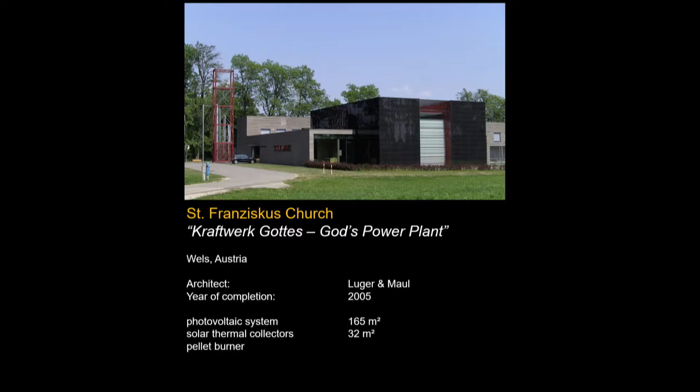Let me render you with this presentation some challenges that we faced in implementing these technologies. What we have at hand is a selection of techniques that are quite common today, but still in everyday construction, not all clients, not all builders are willing to adopt them. The average knowledge of these technologies is increasing all the time, but academic research, of course, runs several steps ahead of this development.

We are learning all the time, new products are coming in all the time, and results are becoming better. But my intention now is to present some remarks and findings on challenges when applying these technologies in practice.

We have wind energy in small scale in the built environment, solar energy, solar thermal and photovoltaic panels, where solar thermal is a more integral part of a building's systems, but photovoltaic technology can be more like an add-on, something you can more easily integrate in existing buildings. Maybe the most difficult part is to find good implementations of wind energy in the built environment.

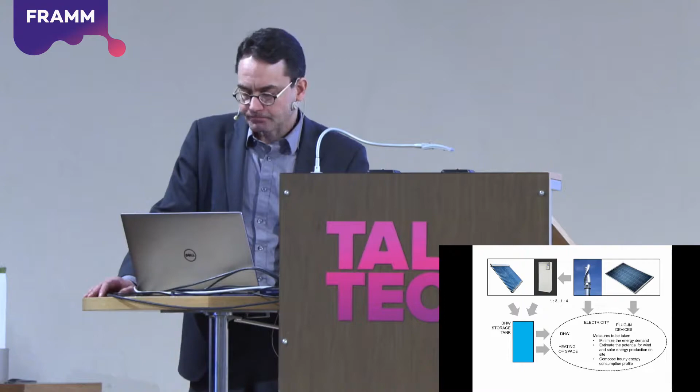The expectations related to photovoltaic energy are, of course, sky high. There are quite high percentages presented of already existing technologies in solar energy and electricity. But what we have today in real building projects is maybe closer to an efficiency of 15%, maximum 18% at system level. I'll show you that in reality, the percentages we gain in real systems remain at a much more modest level.

Never is the theoretical output of photovoltaic panels happening 100% in practice. There are certain constraints to that.

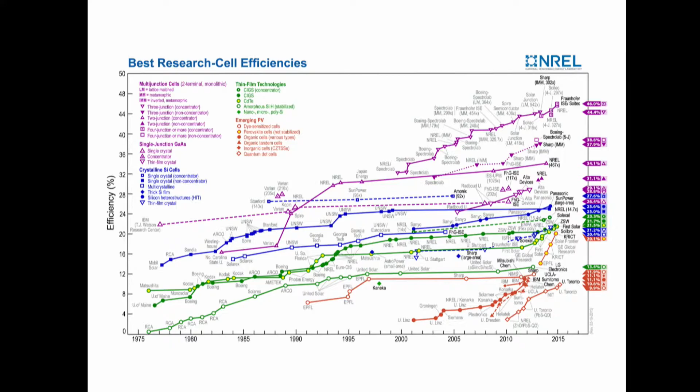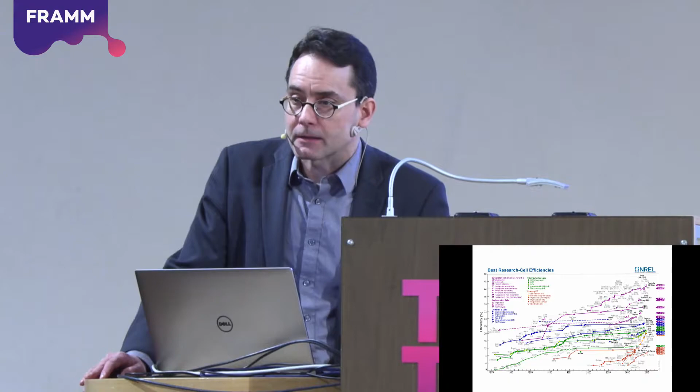This is a chart from a few years back by NREL, which today probably faces a lot of trouble with the Trump government in the US, but otherwise has been a very active promoter of renewable energies, and I will get back to this also. In the Finnish environment, the percentages presented to us are not as high as in the diagram by NREL. They talk about up to 45% efficiency in these technologies.

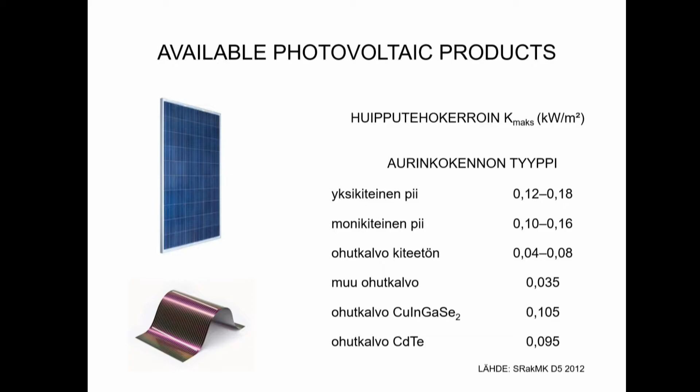We talk about less than 20% efficiency, and that would be in optimal conditions. We have these thin film technologies coming into these integrated panels. There's a lot of research and even some experiments with new technologies such as Grätzel cell, but it seems that still today the best economic solutions are found in quite conventional photovoltaic panel technology based on monocrystalline or polycrystalline silicon panels.

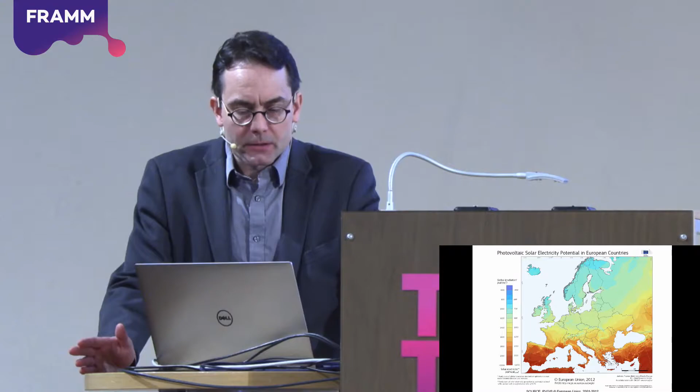In climate charts, this is a diagram often presented when we want to say that the potential for solar energy is quite good in Estonia and Finland. But what is not seen in this annual insolation map by the European Union is that how this solar radiation is divided is not equal within this yellow or greenish tone in the previous chart.

We get a lot of solar radiation in the summertime and very little in the wintertime. So actually in the north our challenges are bigger, and the demand for cost-efficient battery technologies would be actually even higher in the north.

Here we don't actually need battery systems that help us go over one night, but more like seasonal storage of electricity. That is the biggest demand, obviously.

The Swedish researcher Joakim Widén has rightly pointed out that when we talk about net zero energy, we are talking about calculations with a lot of uncertainty. First, energy output numbers are expectations based on standard years of insolation and output that usually never come true in reality. Also, the energy consumption of a building changes according to independent households' consumption patterns. This means that net zero energy balance is actually a highly theoretical value, not a very useful figure to express the environmental performance of a building. I will later show you that other kinds of numbers could be more accurate or useful to describe what is gained with renewable energy in buildings.

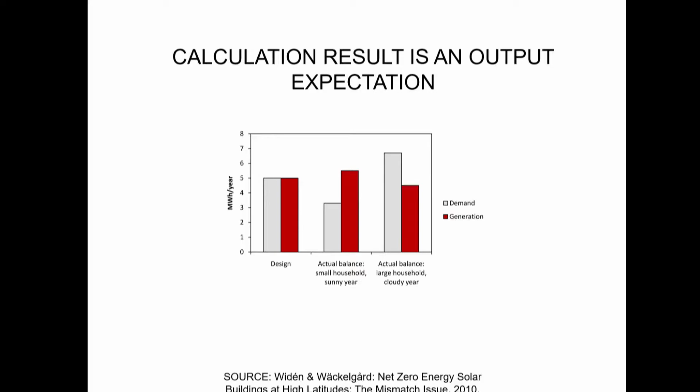We did some studies in my practice for the city of Oulu, which is already quite north. That used to be the northernmost school of architecture for a long time, the School of Architecture in Oulu. Now there's one in Luleå, Sweden, but that's quite far north. Still, up there we are able to show that photovoltaic systems can be a profitable solution. About environmental benefits, I will show you a comparison a bit later.

Here we tried to define what is a good output, how we should use the panels to gain maximum output. Basically, we as architects, as the persons deciding how we integrate these panels, are also defining the profitability of these systems and the environmental load of these systems. The manufacturing and transportation of these panel systems is the same, but we basically determine the output of the system. The very same system can have very good output or much poorer output depending on how we place the panels in the urban environment.

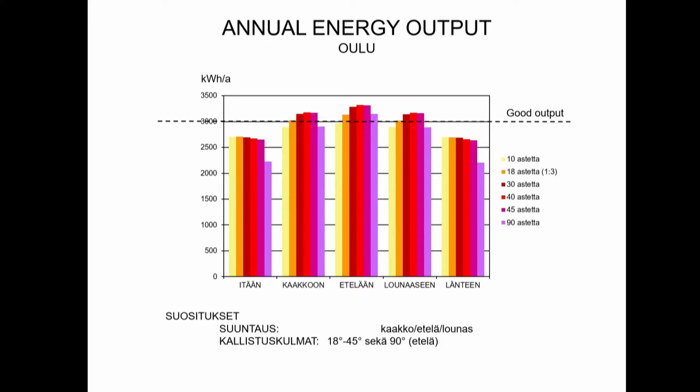This is an example of a daycare center. My office was leading an expert team that created the zero energy daycare building concept for the city of Vantaa, the third biggest city in Finland. These findings from reality showed why the theoretical output of these systems is actually never coming true.

A very small direction change, only 2% off optimal direction, or 24 degrees, causes us a loss of 2% of the maximum output. The buildings around it, adjacent buildings, make us lose 8% of the maximum output. And if we assume that from December to February there will be some kind of snow cover, even though that's not happening every year, we will lose another 5% of the output. Yet with this calculation, we are still on the plus side—the output is good enough to be implemented in our climate.

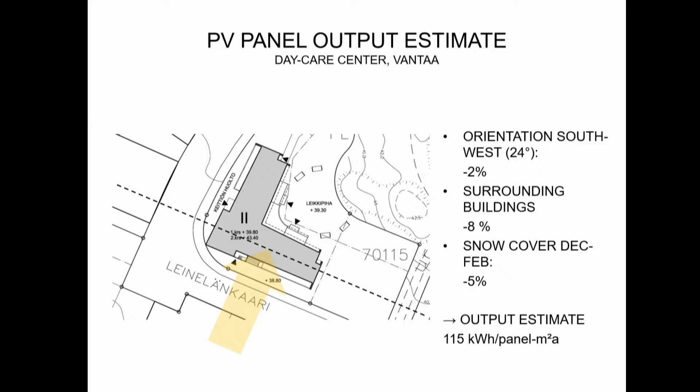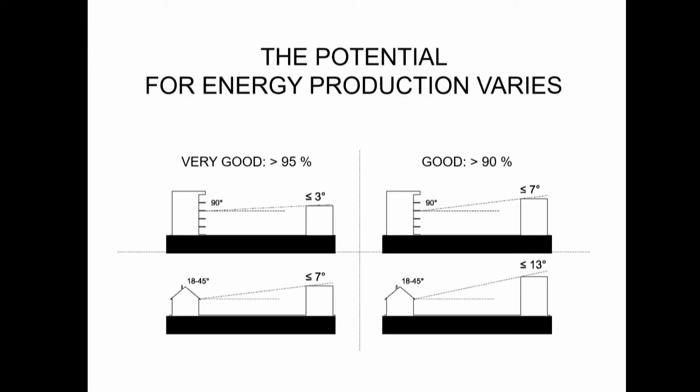This is in the south of Finland, where the output is very similar to Tallinn's climate. For the city of Oulu, we produced guidelines for northern climate—what kind of limitations we can accept in the environment, what kind of shading buildings there can be to have economic viability for these systems. Certain studies of shading of the environment were done, and these are today guidelines in the city of Oulu for implementing these systems.

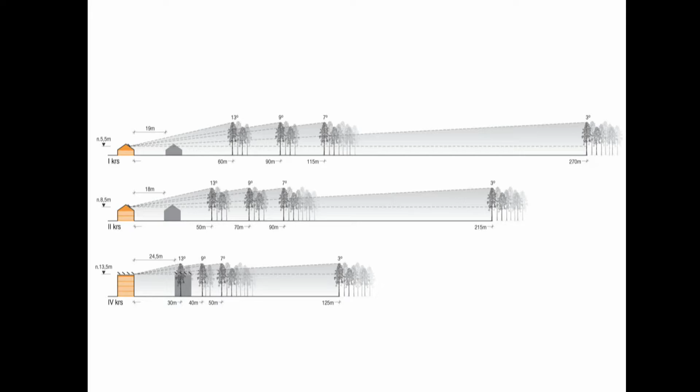Today, what is becoming more and more important is city-scale analysis of solar potential, and this can be done using many tools, but the city model is actually a key tool in this development. I've learned that in Tallinn, Estonia, there's also a project going on that aims to produce a model of the whole built environment. This is just one of many uses where this kind of model can analyze where the potential is and where it's weaker. This will have an effect on prices of plots in the future—what is the solar potential of the plot and site?

This is a study that we did in Turku, southwest Finland, for a housing company that consists of 4 buildings built in the 70s, where we were able to show that from photovoltaic systems on the rooftop, they will basically get cheaper electricity than from the grid, the Finnish grid. All these green locations for photovoltaic systems would give them cheaper electricity than what they pay today for grid electricity.

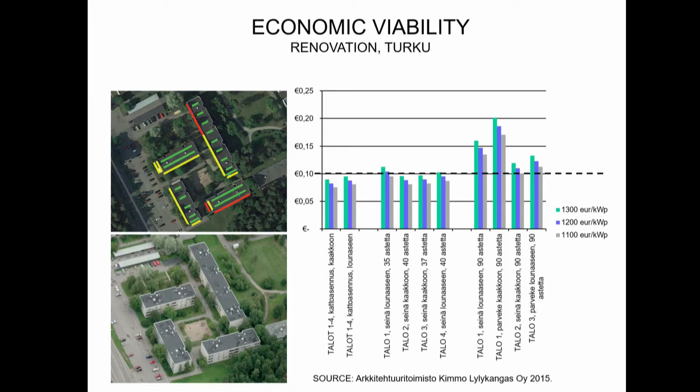But the challenge in reality is not with these calculations, it's actually that with this purchase of a photovoltaic system, you buy 25 years of electricity in one purchase. For this to happen in reality would mean that you want to stay in this building for 25 years—who knows if you want to stay there that long? Or there should be economic systems to pass on these investments to future residents of your apartment. These systems don't exist today, and this is of course something that is reducing or preventing housing companies from making these investments.

Another practical investment bottleneck is that households have their own electricity agreements with energy companies, so it's very difficult to allocate the output of the shared system to private agreements with energy companies.

Problems are not technical, but still very real. One big promise that still, at least in our market area, is not coming true today, even though the products are there, is building integration. That means that even though we have profitable photovoltaic panels at hand, we can buy them now, and by placing them wisely, we get cheaper electricity than from the grid.

We are not using products that would replace a facade material or roofing material, and quite obviously that would improve the economy of that investment. But for some reason this is not happening. This is a big promise that hopefully starts to generate more and more investments in the future, but even the distributors of these technologies confess that for some reason there's no market for these products today. When Finnish investors, when Finnish developers buy these products, they buy them as separate systems, not integrated.

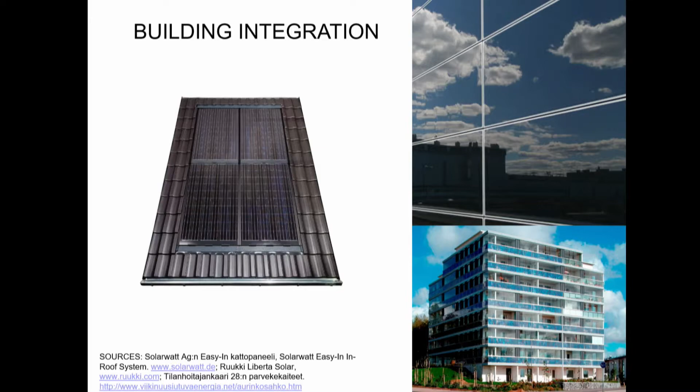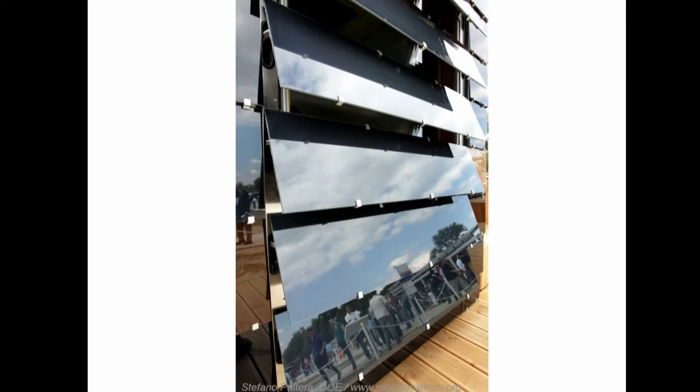And we've seen very clever integrations of the photovoltaic panels in many pilot buildings, but they are tailored solutions. To find products that you could buy for a modern building that today consists of products, there's less and less possibility of tailored solutions in housing production, for example. They are not that many. The most economic solutions are installed today on the flat roof.

An important remark for the economy of these systems is that the way these panels are installed is actually quite a crucial decision, because that can make the systems too expensive and ruin the economy of the investment. So basically we are searching for solutions where the installation is quite easy, and today that's just installing these panels on the rooftop, with weights and not penetrating the waterproof layer at all. With these systems, the economy is quite good, but the dimensioning guidelines in our climate have been missing.

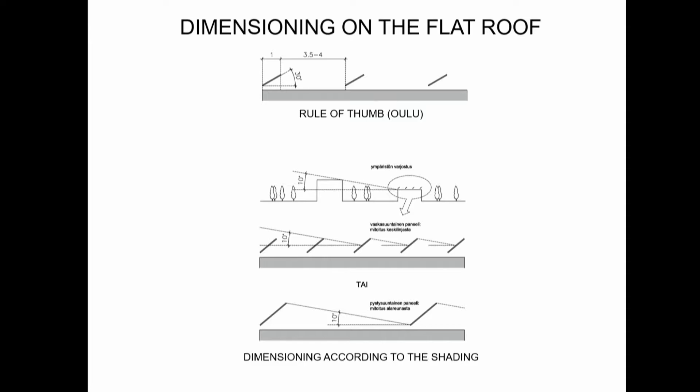In southern Swedish climate, the rule of thumb was that between these kinds of panels, like in the upper image, the distance was 2.5 times the projection width of the panel. In northern climate, it should be more, obviously, as the sun angles are lower. So our recommendation after several simulations was 3.5 to 4 times the width of the panel. This means that on a flat roof, the number of panels is not very high, and the output of the whole system is not very big. There's an alternative system to dimension these flat roof systems, and there the guideline is different depending on whether your panels are in horizontal or vertical position.

The interesting question of load match has been discussed in many research papers, but today is still not very widely understood among the consumers or even developers of these buildings. This means that even if the annual net balance of energy production and consumption would be 100%, you produce as much as you consume, in reality, the energy comes at the wrong time. You don't need it at the time when it comes, and this of course happens in the north more than in the south. We have a lot of solar output in the summer season and very little, if any, in the winter season.

That is without batteries. These studies today are usually hourly-based, which gives us a bit of distortion in the results. They give us a somewhat more positive result than the reality is. But to improve this load match, we can do a lot, and I will later show you some examples.

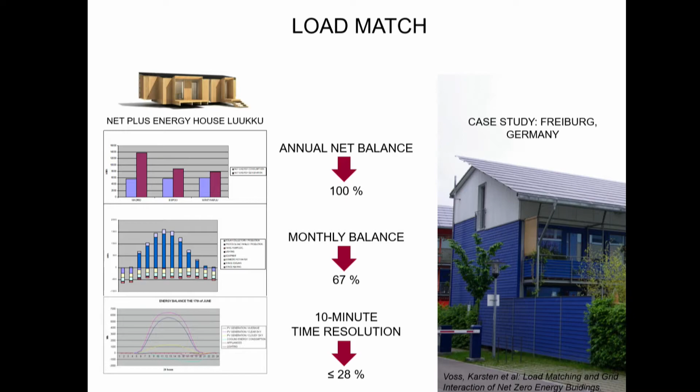My experiences in plus energy building are to some extent from this building, the project that I started at Aalto University. This was the first plus energy building in Finland that we took to take part in the Solar Decathlon Europe competition in 2010. We got the first prize in the architecture contest and were in fifth place in the general competition. So we were doing quite fine with Finnish products and Finnish know-how, and I believe that with Estonian knowledge we would already be in a very successful position over there.

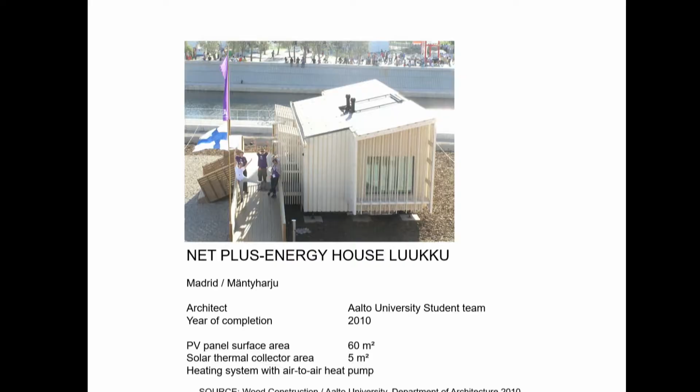The challenge that we wanted to take with our student team, which consisted of about 100 students altogether, was that we tried to make it a plus energy building both in the northern climate and in the southern Spanish climate. And this was quite a challenge. For those who don't know the competition concept, this is something that was started in the US. Maybe you know that whenever there's a Democrat president, all renewable energies are highly supported by the government, and at times like this, they are quite the opposite, not supported by the government.

I don't know what is happening with this competition today, but the original concept was to collect 20 plus energy buildings on the National Mall in front of the White House from university teams to compete for 1 week in not only energy, but in 10 contests. And this is a great learning environment, of course, for university teams to learn about other teams and develop their own concept for plus energy buildings.

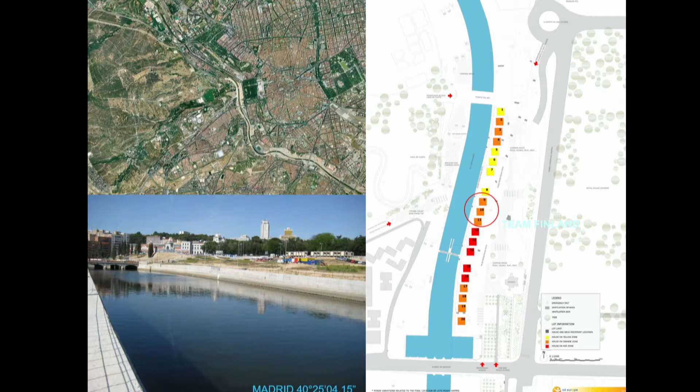Our building was here in Spain, and an interesting remark for this area by the riverside in Madrid was that the master plan for this area had to be done in 3D to secure that all the plots have equal access to solar radiation. This is maybe the future in planning here as well. If we want to provide equal opportunities for builders to use solar energy, we have to make studies not only on 2D maps, but in 3D reality.

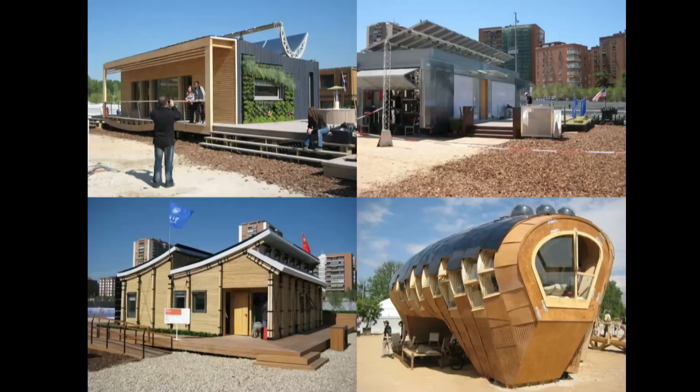This is our building over there, and these are some competing houses. We can see that plus energy buildings and the integration of photovoltaic panels can have many forms. There's no one fixed form for this integration. Some of them are more successful and some, of course, less successful. We were going on with not that experimental systems, but still some things we could do with photovoltaic panels. We used panels where the modules are very tightly packed to have maximum output, and we used so-called pyramid glazing to maximize the output of the system.

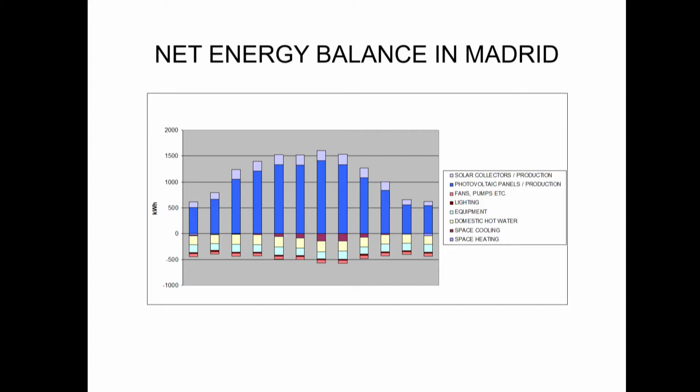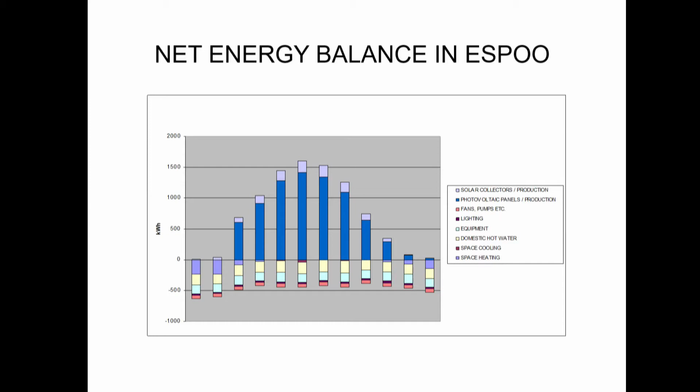And this is how the energy balance looked in Madrid. You see that in that climate, I think the load match can be much better than in our climate, where the winter season can be easily noticed in here. This is our challenge in plus energy building. This is something that we need to overcome in the northern climate, and that's not an easy thing to do. The net zero energy balance is purely a theoretical figure, but if we want to survive these seasons with renewable energies, we have to come up with some new solutions, not only photovoltaics. Maybe it's batteries, maybe it's something else.

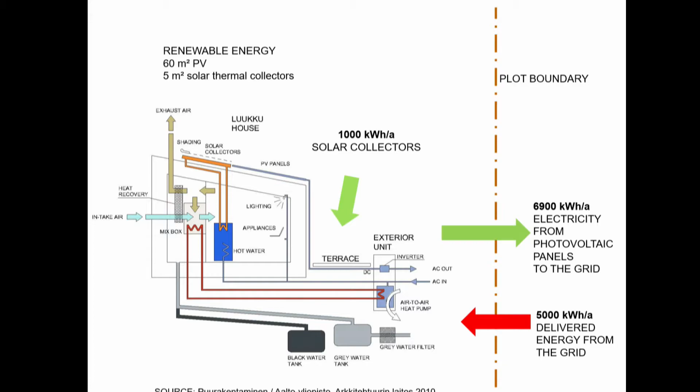This is the final location of the building. In this building, we didn't deal too much with the load match issue. We were just producing as much as possible for the grid. That was one part of the competition, and then purchasing energy from the grid. This is how it works today in Mäntyharju. One finding of this balance, and I was not satisfied with this result, was that the larger the photovoltaic system, the less it covers of real energy consumption. So this is the load match issue. When you only buy a very small system, you always find a use for the electricity that you produce.

But the closer you get to an annual net zero energy balance, the bigger is the difference between the real CO2 reduction, caused by the fact that you don't need to buy this energy from the grid at all, you get it from your own rooftop, and the investment, which is of course very high here. This part is something that you cannot use when it comes in the summer afternoons or spring afternoons, when the building simply doesn't have places to use electricity.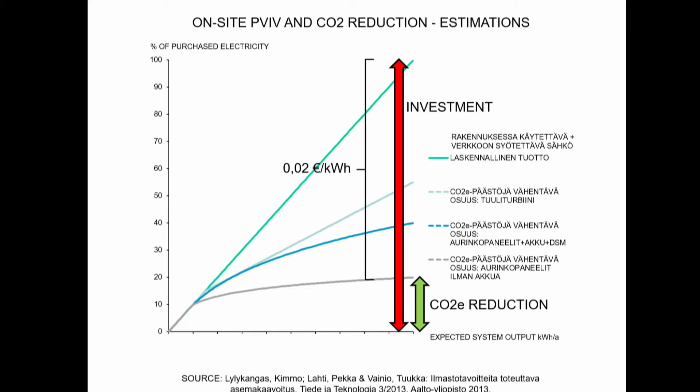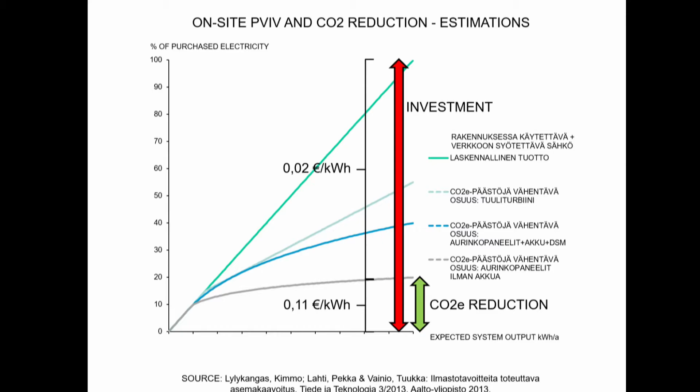This is the pricing, the economic equation of the system. This is what the Finnish market price for this electricity is without any subsidies. And this is what, in this example, a Finnish owner of the building pays for grid electricity.

So-called demand-side management could be an opportunity to engage also architects in this work. This means that we could time the energy consumption to match better with the energy output from the photovoltaic systems. In this simple study, we have a photovoltaic system of 8 panels, that's about 12.8 square meters on rooftop.

And simply by timing the use of household appliances, we get much better match in load curves, in energy consumption and production. This is a Finnish hourly consumption pattern where you see that the electricity consumption is very much happening in evening time.

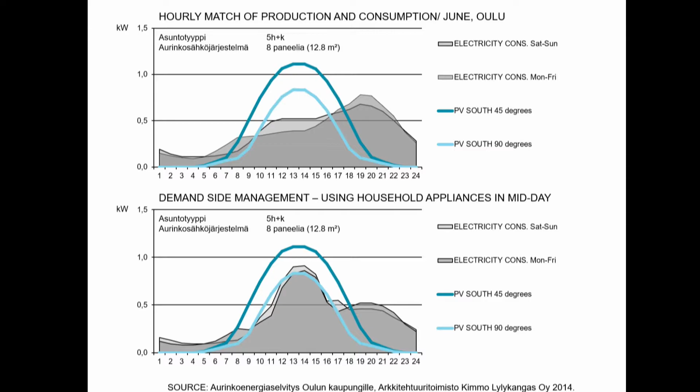Then I'm often asked if this really makes environmental sense to use photovoltaic panels. Don't they make these products in China and they have to be transported all the way from there? They have aluminium layers and glass panels and all kinds of components. Yes, they do, but we can compare the CO2 emissions of these products with the grid electricity through LCA-based studies.

This is a Swedish study from maybe 6-7 years ago where they compared, in an LCA study, the photovoltaic output and its CO2 emissions per kilowatt hour with grid electricities in Sweden, Iceland, Finland, Germany, Estonia, Poland, and the European average. And there we see quite an interesting remark. In Iceland, actually, using photovoltaic panels causes environmental load. It's much better to use grid electricity over there.

In Sweden, yes, you maybe gain something by using better photovoltaic panels, but the difference is very small due to the fact that about half of the grid electricity comes from hydropower plants. With the Finnish grid, the electricity that this replaces, you can see that it's already quite beneficial to use this.

But it's important to notice that if we, as architects or designers of the built environment, place these panels, make them face in the wrong direction or use angles that are not optimal, this increases, because with the same environmental investment, we get smaller output. So our choices here can actually increase this beam here.

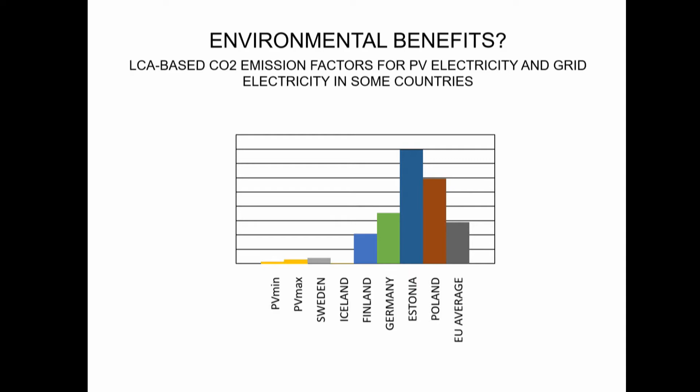Then comparing with Estonia, for example, it's quite easy to see that there's a very good reason to use photovoltaic electricity over here. The grid electricity that it replaces is very CO2 emission intensive. I then wanted to compare this with a newer source of information. This is statistics by the Covenant of Mayors created in 2017, and the latest figures are from 2013.

Actually, the differences between these country profiles have even increased. So it seems that the reason to invest in photovoltaic panels from an environmental perspective is not going anywhere. There's still a very good reason to do it. But interestingly, the Swedish development seems to be going in that direction where the difference is becoming really, really small.

If you sell a photovoltaic panel in Sweden, it might be, sorry again, wise to tell them that maybe you could save your money and use grid electricity instead, and the environmental benefit would be exactly the same.

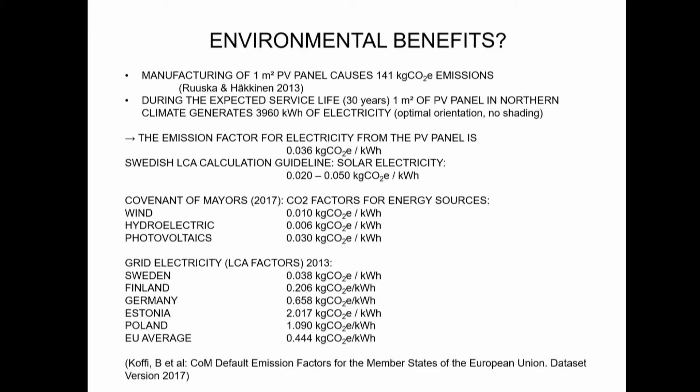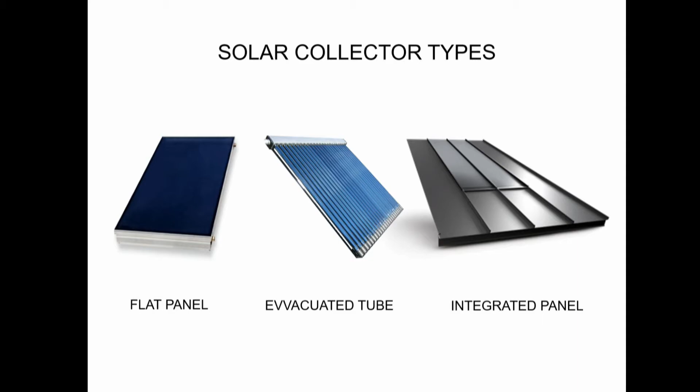In solar heat, the efficiencies of the systems are much higher, but for the consumers and developers, these are more complicated systems. This is something that you cannot simply add on. You need to integrate this in your heating system, and especially in the northern climate, this is not very easy. If the real percentages of efficiency in photovoltaic panels are somewhere between 15 and 20 in best cases, in solar heat systems we go up to 40% in very standard systems.

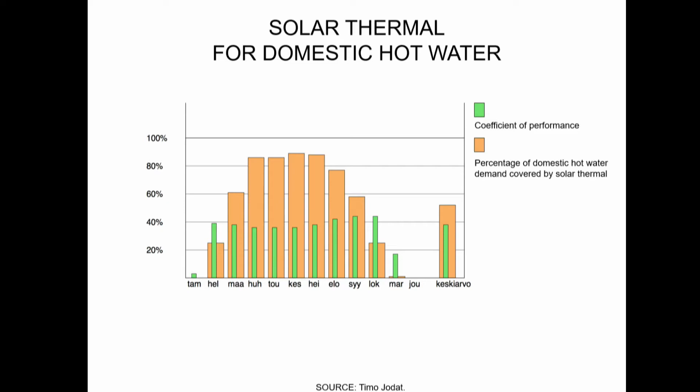Understanding the potential of solar heat, we tried to put that in this figure here. You can basically in our climate produce half of your domestic hot water with solar collectors. And if you want to invest in a larger domestic hot water storage tank, you can cover also some of the space heating, but 10% would be a safe estimate for that. This is simply because of the mismatch in production and consumption.

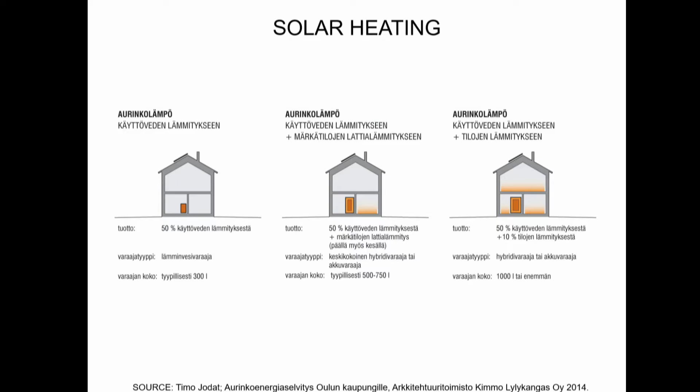This is a quite standard solution today. Also, the market is already believing in solar heat systems, so there's nothing exotic, nothing to be tested, but the possibilities of using these potentials and the dimensioning principles could be improved.

What we see today often happening is too large solar collector areas. That means that the economy again is ruined. You buy too much collector surface area, and then the users of the building are surprised when the benefit doesn't grow linearly, but is limited by the mismatch problem.

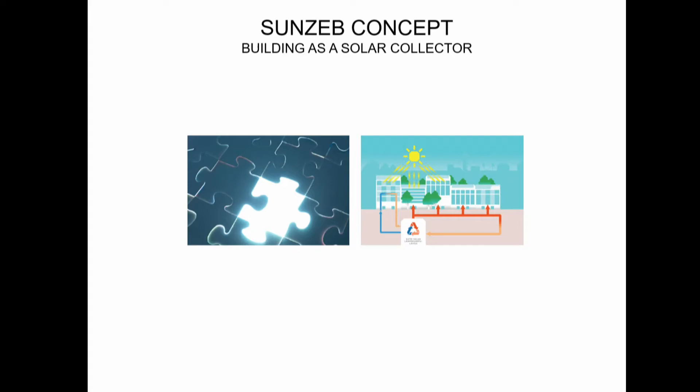I was part of this interesting development project quite recently where we think of solar heat in a different way. This is now city being the system, not a plot boundary or building. The city of Helsinki, in this case, developing a system of district heating and district cooling, and buildings are now solar collectors. In this project we were looking at office and residential buildings as big solar collectors taking in too much solar heat, too much in that sense that it needs to be cooled down.

But the city system can make use of this excess heat. In heat pump systems, they can be used in other parts of the city. And this, what I found very interesting here, is that cities may be a much better boundary line for these energy studies than a single plot or a building.

The whole point why we have cities is that we don't need to survive by ourselves. We don't need to build buildings that, like in the Wild West, were surviving by themselves. The whole idea of building self-sufficient buildings is not working along with the idea of a city. Instead of inventing concepts like passive houses or zero-energy houses, we should ask what kind of building fits to this infrastructure, this city.

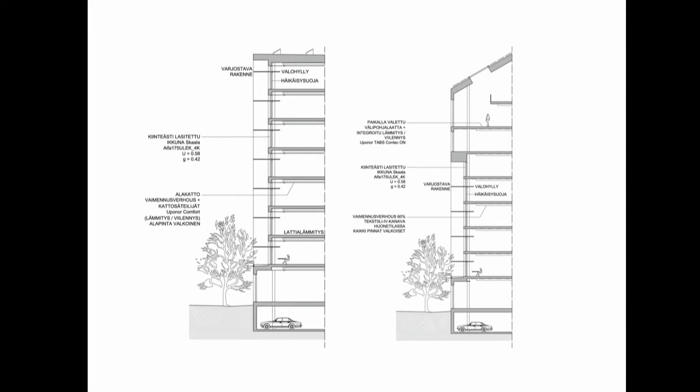And the same thing in residential buildings: we save a lot in heating. At the same time, we need more cooling, but the difference is much, much less.

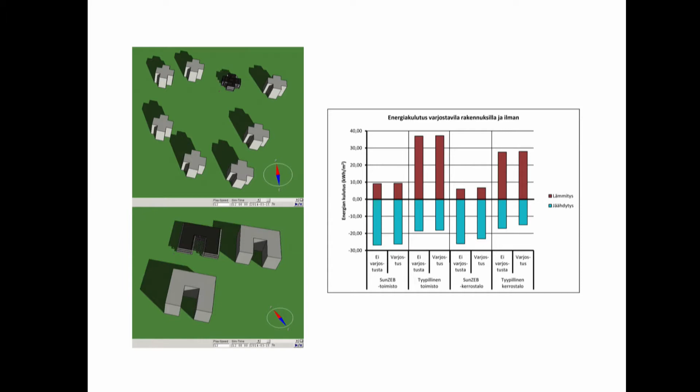Surprisingly, the study of the whole energy grid in Finland showed that the CO2 reductions are very small. This is because in our heating production system we use CHP, which means that savings in heating energy don't necessarily give us savings in CO2 in electricity production. They are combined together, and we could not actually, in these studies, prove any significant reductions in CO2 emissions.

One system of using solar as a heating device is, of course, passive solar, which is not used in our climate at all, even though the potential is there. Even up to the level of Oulu, the potential of saving in heating energy demand could be up to 20–30%.

And what we were looking at in this study was this curve here: what kind of window and building configuration could give us a situation where increasing window surface area means less heating energy demand of spaces. With very high G value and the right kind of architectural design, we can have that situation.

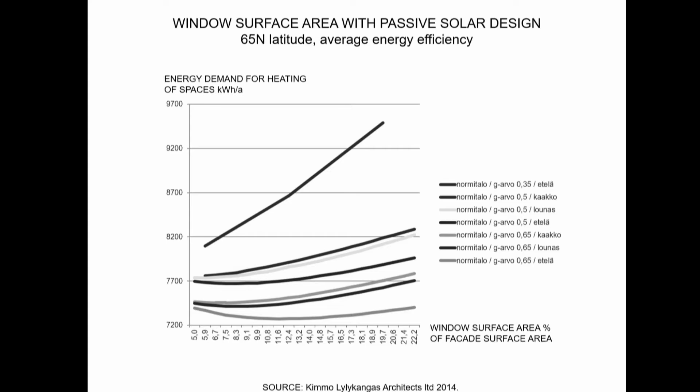But this is something that is quite difficult or impossible to find in modern glazing products. On the contrary, several layers of glass seem to lower the G value rather than increase it. And the skills of architects to produce this kind of buildings are not that good, I would say.

In wind turbines, the possibilities of integration are even more limited. This was discussed already this morning in the presentation, but the same kind of discussions have been going on in Finland. The biggest investments in wind power are being done in Ostrobothnia, on the West Coast, where there is already a situation that all the existing investments cover the area so well that you cannot find a place in Ostrobothnia where you wouldn't see at least one windmill working. And they are quite huge structures, of course.

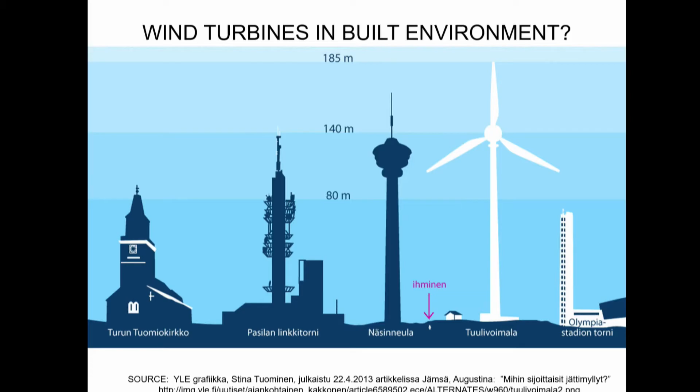In urban scale, integrating this kind of device, this finished product, is much easier. Until last year, I held the IPR rights of an innovation we did about 15 years ago in one project, where we made an off-grid street light using this kind of wind turbine, LED lights, some batteries integrated in this pole, a new kind of pole with environmentally friendly impregnation.

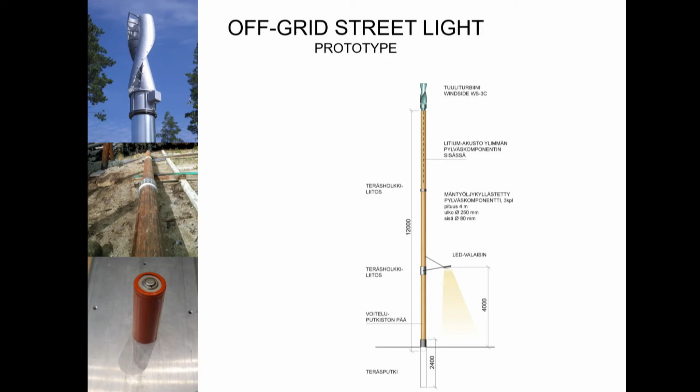The possibilities to use these kinds of lights, for example in sparsely populated countryside, would be quite interesting. But as you can see with this example, the output of this system is quite small. And if you think of a big office building, for example, you could say that in the energy balance calculation of this building, these are just decorations.

One challenge that we face with wind is that we have a lot of data available about wind conditions, but that's only up to a level of 50 meters. If we want to integrate these systems in the built environment, we're talking about different heights: 10 to 20 meters, 25 meters, and this data is not available. There's a good reason for that: the city itself is a device that redirects the wind, accelerates the wind speed, and slows it down. It's something that we don't have knowledge of today.

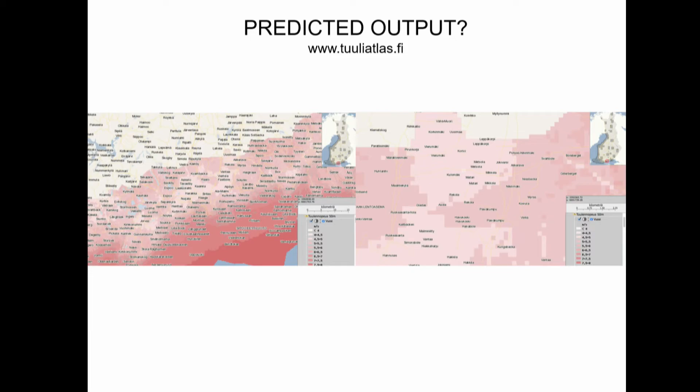This also, I hope, will be improved when we have city models available and can do CFD simulations in an urban environment to understand the pressure differences around the building and the wind conditions in the urban environment.

One field of experiment that I've been involved in has to do with CHP, micro CHP, integrated in the built environment. This means combined heat and power. In these units, you produce heat but also electricity, in this case using wood chips. There are also smaller systems using wood pellets, and the opportunity is to generate electricity on site from renewable energy sources.

The great benefit of this Finnish device is that it uses a so-called gasification technique. One problem whenever burning wood is the small particle emissions caused by wood burning, which is quite an important health risk, a crucial thing to control. In this gasification technique, that is controlled 100%. What we get out of this kind of unit is about 8 units of heat and about 3 units of electricity.

In this case, it was placed in this residential block in Oulu. This forms one entity where 2 loops of heating connect these buildings to this CHP unit. It needs regular refilling of dried wood chips, and availability of these chips is one critical development requirement in practice.

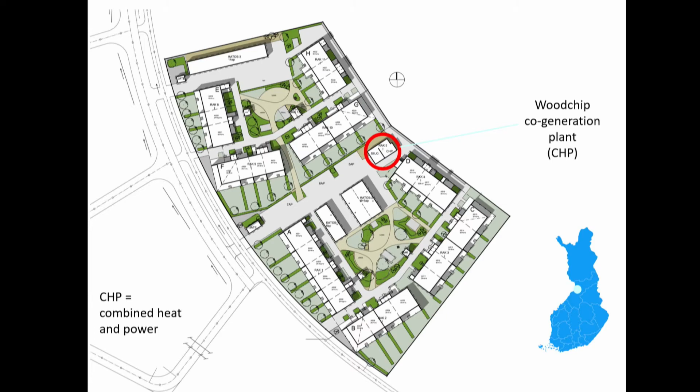For this reason, we are not able to use this technology, for example, in coastal areas in southwest Finland. Also, the burning of these chips causes low-frequency noise that we didn't know about before we did this prototype project. So even though this device is underground and surrounded by concrete walls, there's a really low-frequency noise that can cause some disturbance to the residents nearby.

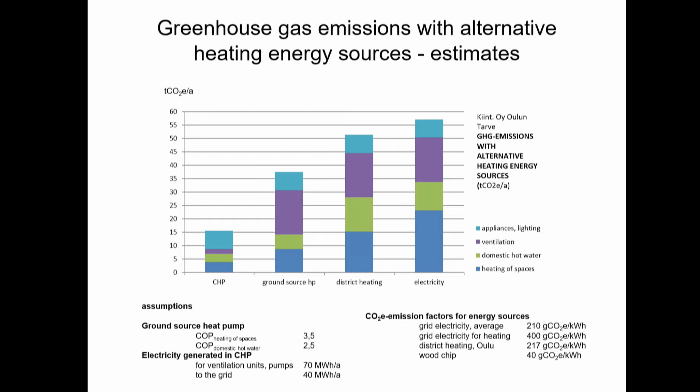However, the CO2 calculation of this system shows quite good results. This is a comparison of the CHP solution with the best ground source heat pumps available, district heating, and electricity heating. When we can also have very low emission electricity from on site, the total CO2 emission calculation shows very good results.

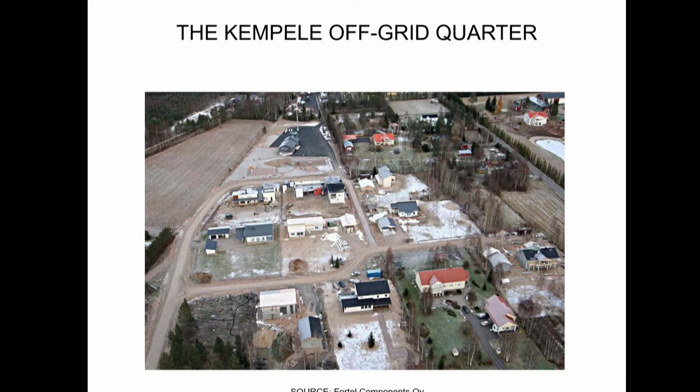There's already an existing off-grid quarter in Finland called Kempele Eco Village that operates with wind power and this kind of micro CHP unit alone. However, this kind of solution has to be something we already take into consideration when planning the area. We need space for this kind of unit which is safe for the environment, and this noise has to be taken into consideration. Also, the heat distribution system has to be based on this kind of loops, because the heat is distributed at quite high temperatures.

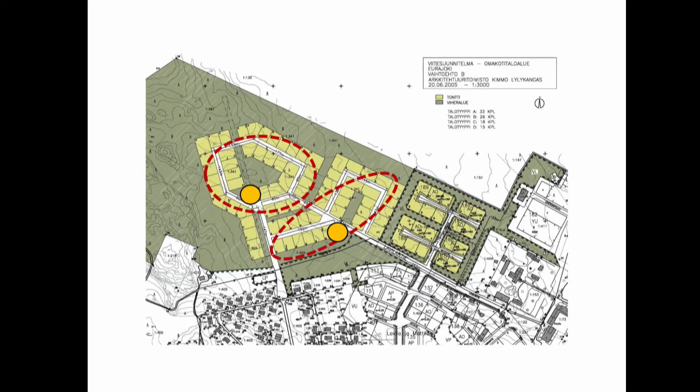These are some examples of master plans that could support use of CHP, micro CHP units. This is one of the student projects that I've been doing. This was at Aalto. I was leading the team that took part in the competition in Japan.

Our entry was called the 5-tree house, because with wood pellets from 5 trees per year, we can cover the whole energy demand of the building, both electricity and heating. So we created a story where the family plants 5 trees every year as a kind of compensation for the energy it uses. This is totally off-grid.

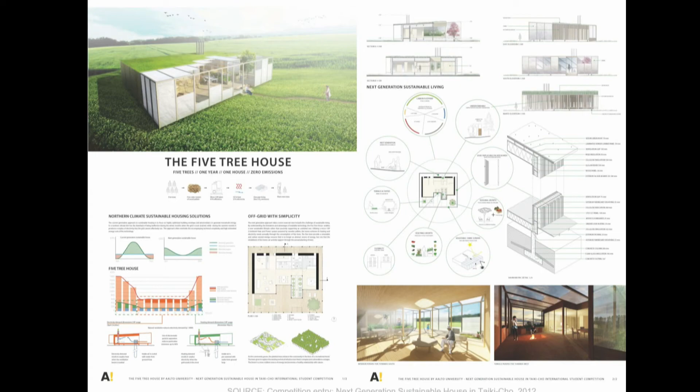The interesting study for us was to look at, in the summertime, the CHP unit driven by electricity demand, and in the wintertime driven by the heating demand of the building, and finding use for this excess electricity and excess heat.

I'm going to move to concluding remarks now. I'm sorry that my voice seems to be breaking after a long flu. My concluding remarks have some things to say about these experiences.

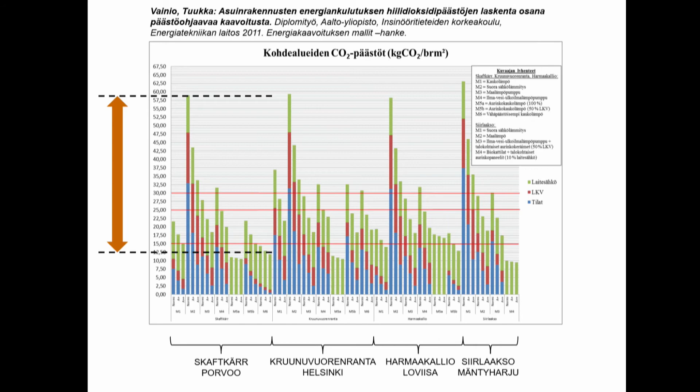Regionally, we have different kinds of potentials for these choices. I will not go into details because time is limited, but this is how we see the potentials in Finland. Probably Estonia could be mapped in a similar way.

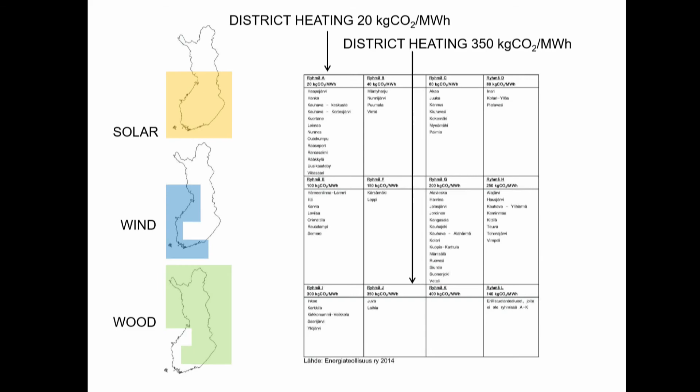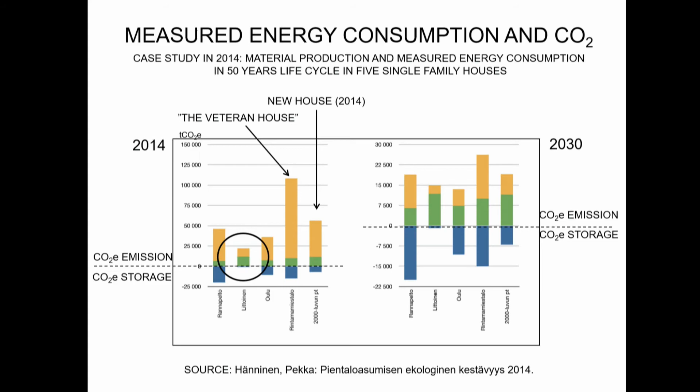New parameters for these examinations could be the real energy consumption, because that is always different from the calculation, the assumption of future energy consumption. This is due to many reasons, but to see this as a parameter is very important. This is a study of single-family houses in Finland based on measured energy consumption and real material choices of these buildings.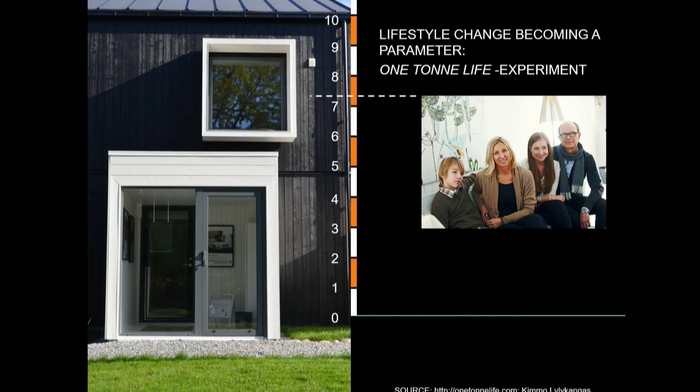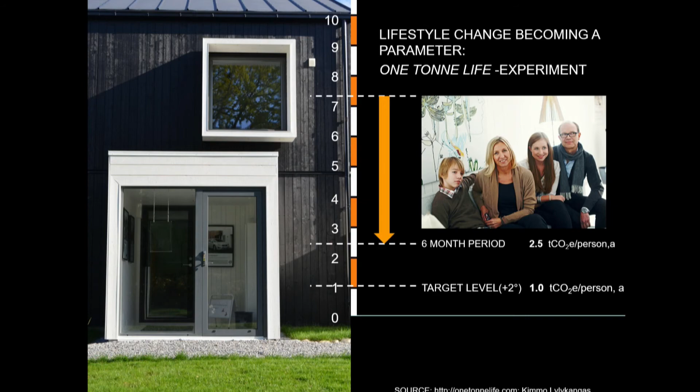I will conclude by presenting this Swedish experiment from some years ago. A voluntary family wanted to live in this experimental building for half a year, trying to reduce their personal CO2 footprint down to 1 ton per person. They didn't quite succeed. They went down to 2.5 tons per person a year, and during one week they were able to go down to 1.5 tons.

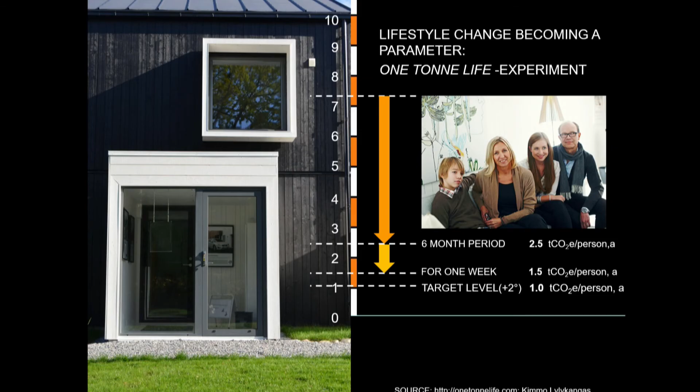For me, this is a very important study, because this is the climatic target we are facing, not only to reduce the carbon footprint of buildings, but personal carbon footprint. And if we look at what buildings can do to help these families do this on a voluntary basis, we get to concepts like the smart city. Sharing this information about the everyday choices of everyday life is something these people need to make these decisions.

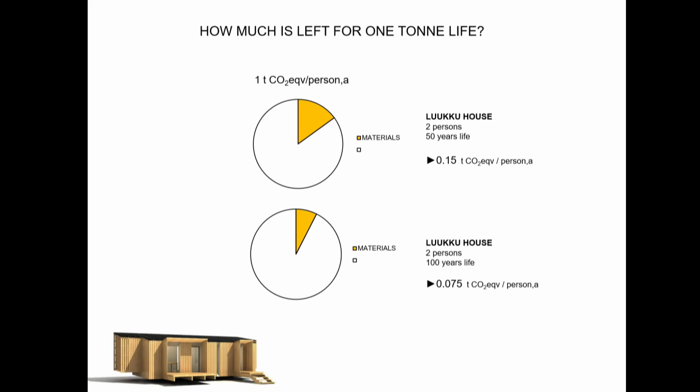Also, when asking what kind of buildings would be future-proof, it's difficult to find any good answers. But we can start with the 1 ton CO2 emissions per person. The buildings, their materials, and energy use in the buildings eat some of this 1 ton. Our target could be that the buildings, the built environment, eat as little as possible of this 1 ton. So the more we have left for traveling, hobbies, and comforts of life, the better the situation.

These are two studies where we wanted to examine if the best buildings could be analyzed this way, how much they take off from a 1 ton life. Quite little, but still quite big pieces. This kind of examination helps us see what is the long-term target for the built environment, not only what the EU says, but what would be the solid future target to limit climate warming down to 1.5 degrees, or 2 degrees as it was before. That would already be quite a good result.

For this, we need new kinds of buildings and a very small CO2 footprint for the buildings, both in materials and in the use phase of the life cycle of the building. Thank you.

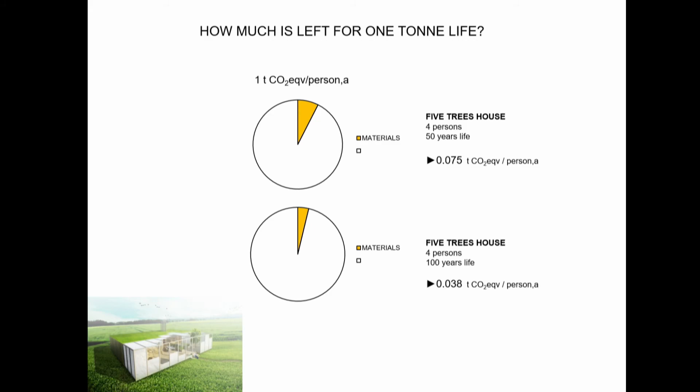Thank you very much, Kimmo. We don't have too many questions, but one would be: what are the maintenance problems of maybe photovoltaics? How often do you have to clean them? What are the problems with the maintenance things?

I apologize for my voice again. Maintenance is actually quite simple with photovoltaic systems. When we get systems with batteries it becomes a bit more complicated, but just single add-on photovoltaics are quite simple and straightforward products to have on your rooftop. We have prepared guidelines for some building owners to clean them once a year and take the snow cover off at the end of February. But even without this kind of maintenance, they perform quite well. However, the lifespan of these systems is quite limited—up to 25 to 30 years is expected for the panels. But already in 5 years there are inverters that need to be replaced, so the life cycle of these inverters is much less, and in reality less than 10 years.

Thank you. And soon we will hear about off-grid solutions. Have you had any experience with off-grid houses, and how is the load match problem covered in these buildings? That's a very good question.